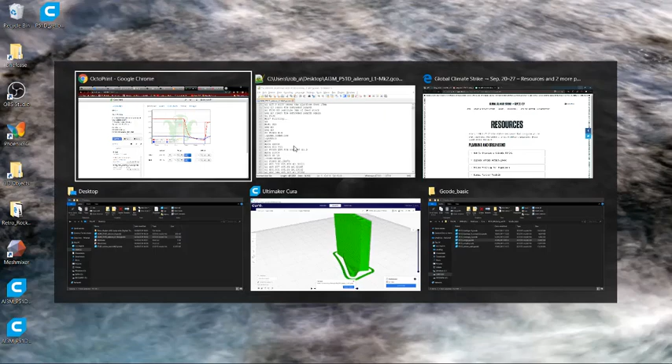Okay, some minor tweaks then. Let's get across to Cura to start with. So I've been experimenting with some of the settings. This is the ini file for the P51 Mustang, and the ones that I've been messing around with

were around printing temperature. So I've increased the bed temp to 70 Celsius, left the flow rate around 104. Printing temperature really depends on the material that you're using. I'm currently using a PLA. It seems to be happy at around 200 Celsius.

As we're doing aileron parts and elevator, we're now using a top and bottom pattern of zigzag. You can use different formats, but really zigzag seems to be the best. If you were doing circular stuff, maybe concentric rings, and you can experiment with the different types, but in terms of structural integrity, strength, zigzag works quite well, especially when you're looking at these parts down here, and because these bottom layers are slightly thicker to support this control horn for the aileron.

As we're doing control surfaces, we've got bottom layers set at 8, bottom thickness of 2 millimeters, top layers of 2 in this example, because there is going to be a top layer here. And you can again play with the top and bottom thickness. We're still using a layer height of 0.25, a wall thickness of 0.4, and a wall count of 1, because we're using thin wall printing for the actual surface, the control surface. All the usual settings apply.

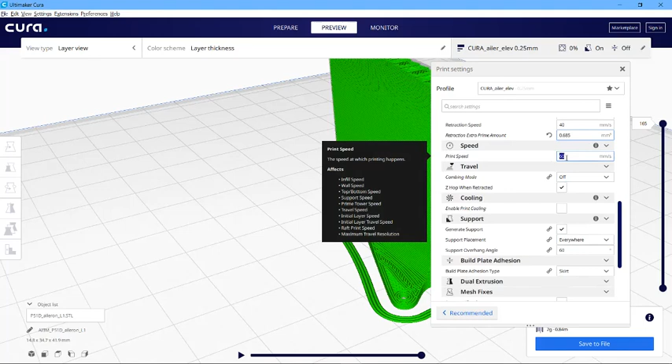Print speed, I'm experimenting with a slightly faster print speed. Combing remains off for this one, but I have enabled Z-Hop Retract. Don't really need it for this part, but as I'm going to be printing out multiple parts, this is just a test piece really, just to establish the strength and integrity of this control horn down here and the bottom layer. So sometimes it's good to print out one part, test the strength, integrity and everything else about the material flow, just to see if it works okay.

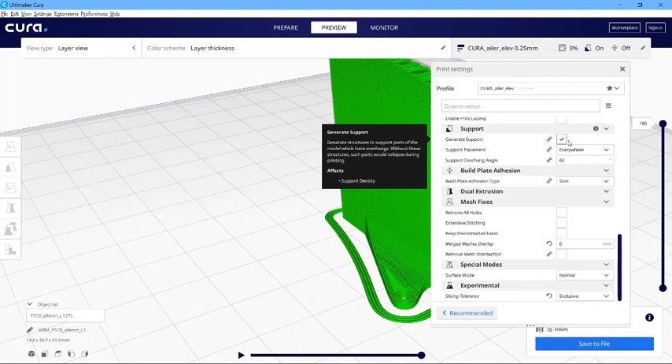There is no real support required for this. Switched on or not, it's not going to make a difference on this part. We're using a skirt, and you can see the skirt around the edge here. Because the control horn itself will be squished down, it's providing fairly good bed adhesion. But if this were thin wall printing, with no kind of control horn, nothing in other words to keep stability, it'd be a good idea to add a small brim, and the brim will then attach to the base of the surface. And that's what I've found, especially with the wham bam build plate, or if you're printing on glass. But again, that's all down to experimentation with your printer.

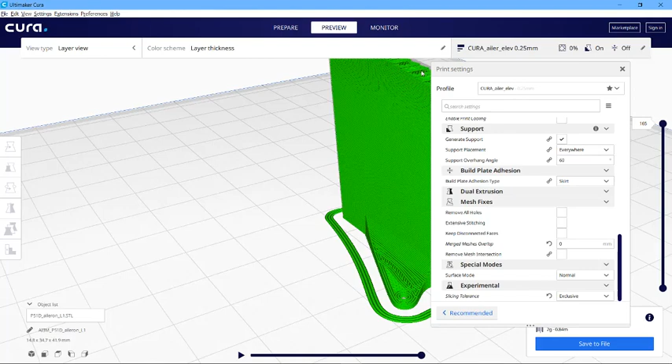Because if you do get a bit of snagging where the print head clacks, and you can hear it sometimes on the Z-axis where you hear a clicking sound, it's quite possible that as the object gets taller, it can actually topple it and snap it off the build plate. Which it did on one occasion on a very, very tall fuselage part that was thin wall. It just knocked it off at about 70–80% up and effectively ruined the part.

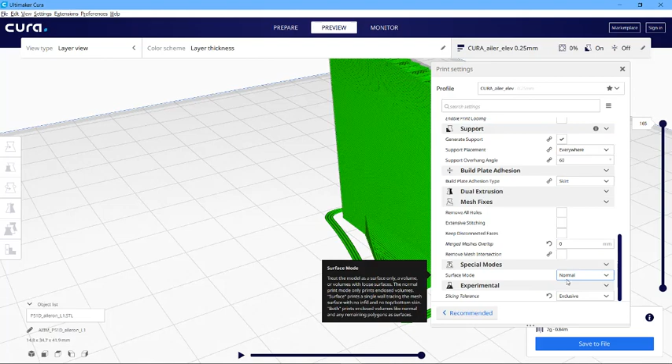Everything else is set as normal for thin wall printing and Cura for this 3DLabs part. Surface mode is normal, slicing tolerance is set to exclusive, and all your mesh fixes are unmarked. Once that is done for this particular one, then you simply save to a file. Alright, and you'd save it away, whatever.

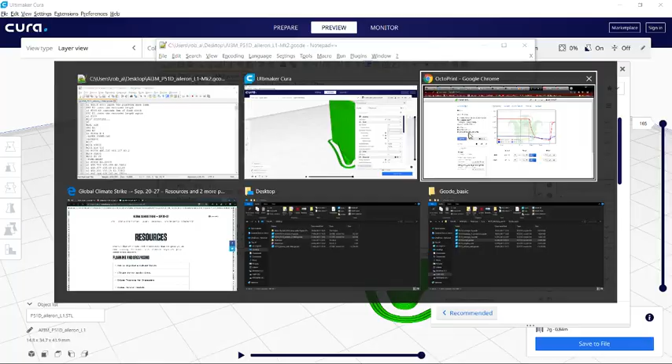because if you wanted, for example, to use G-codes, so you've outputted the file into a G-code, or you want to take existing G-codes, then you can actually set the extrusion rates within here. So for a Bowden system, remember, we're typically using a retract of about 4 millimeters. With a non-Bowden system, they're leaving it at about 0.7.

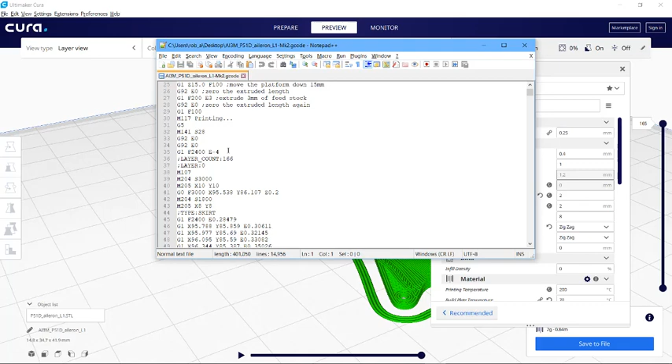So the G-codes that come with the P51 Mustang direct from 3DLabs, these G-codes are modeled in Simplify3D, and they are set by default to use a non-Bowden. Bowden means the Bowden tube that connects into the hot end. So they've got a printer that they're using which is not using a Bowden.

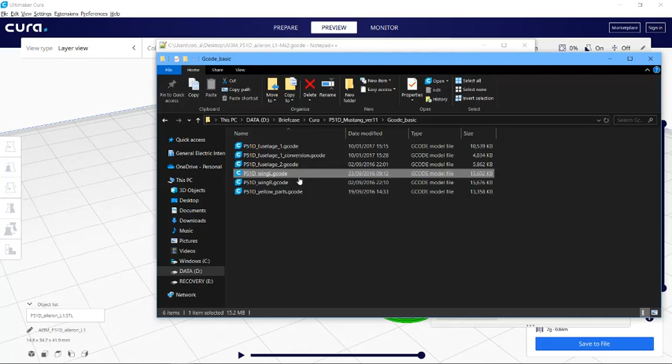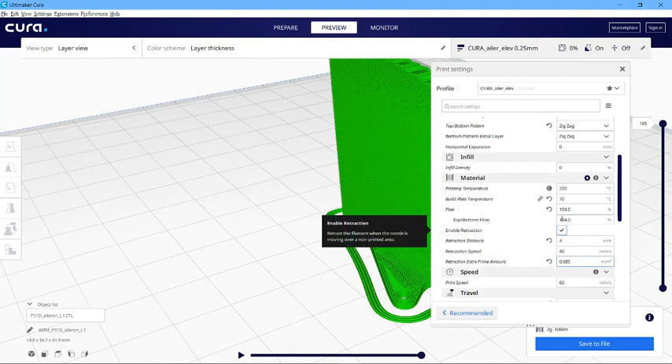Whereas I'm using the Anycubic, and I've yet to get perfection in terms of getting rid of stringing or whiskers, and you have to mess around with the extrusion settings. Now you can do that in Cura by playing around with both the temperature and the bed temperature. Bed temperature is quite important, especially if you're moving between a lot of objects on the bed.

You want all these objects to remain at a decent temperature, so that when you return the head to these components, they're nice and warm. And therefore the material flow will be good, because you'll get good adhesion as it goes back and forth between the different objects on the bed.

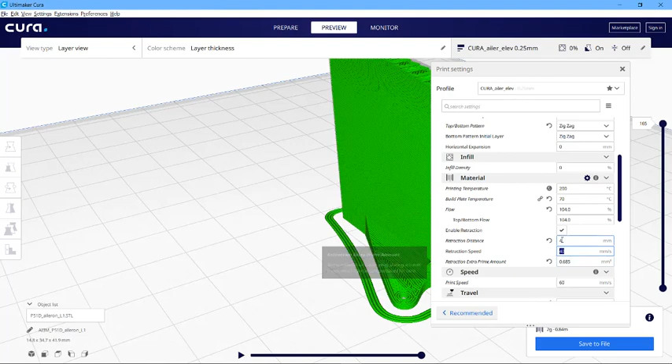But the downside of printing multiple objects on the bed is that you will get whiskers that can go between the different objects, and so you have to mess around with your build plate temperature, your flow rate, your retraction. So I've set the retraction distance. For a Bowden based system, it's anywhere between 4 and 6 millimeters.

So you might want to experiment, start with 4, see how it works out, then inch it up by 0.2 millimeters, etc., until you find the ideal rate. In terms of retraction extra prime amount, what that means is that you retract when you move between the objects, or if you're Z hopping as well. Z hopping means you're lifting up the head and moving to a point within the object.

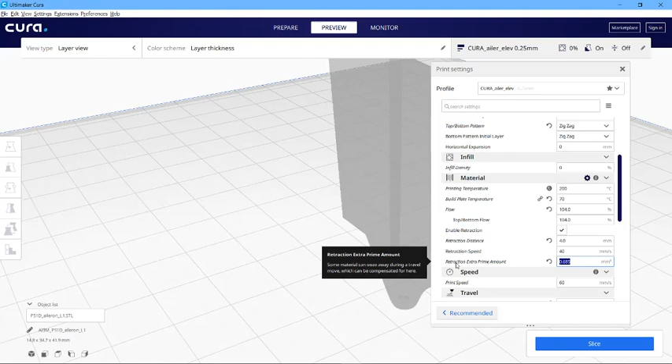What you can do is then prime the head, effectively you're pushing filament back into the reservoir, and you can experiment with this value here to get effectively a pump effect by pushing the filament back into the reservoir and re-priming it. This is what retraction extra prime amount actually means. It's a funny term, but that's actually what it means.

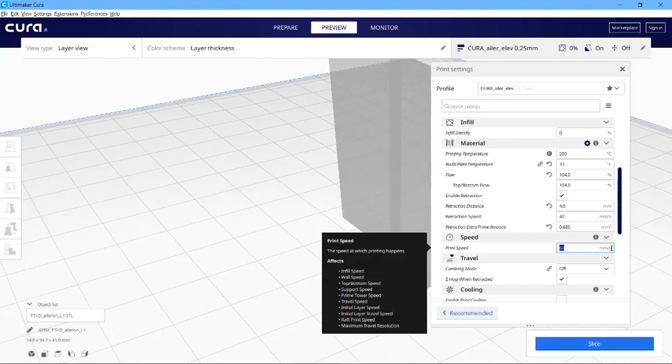And again, you can experiment with all of these settings and the print speed to get the desired behavior. Now these seem to work fairly well for an i3 printer, but you need to mess around with these until you get the settings that you look for.

But with the G-codes, what you can do is come in here and search for the G-code G1 E. I think it's E, I'll have to go and look for it in the video. But you can look for the G-codes in here and then modify them yourself. You can modify the bed temperature, the head temperature, all of these settings you can do directly.

And what you can do is search for and find all reoccurrences, for example, for the extruder retraction rate, and replace all of the settings, because there are multiple ones. In some cases there are only 1 or 2 settings that you need to go and change, because they're generic, but in other cases they will apply to different components. So G-codes, not to be frightened of. I'll come back and do another video around G-codes, but just some things to consider.

I'd also recommend you get Notepad++ because it's a much better editor. Plus you could have 2 or 3 different copies open, and you can compare and contrast between the different files. So you might take a standard G-code, have a look at that, and then compare it with your own G-code after Cura has output it. So this is a modified version I've done.